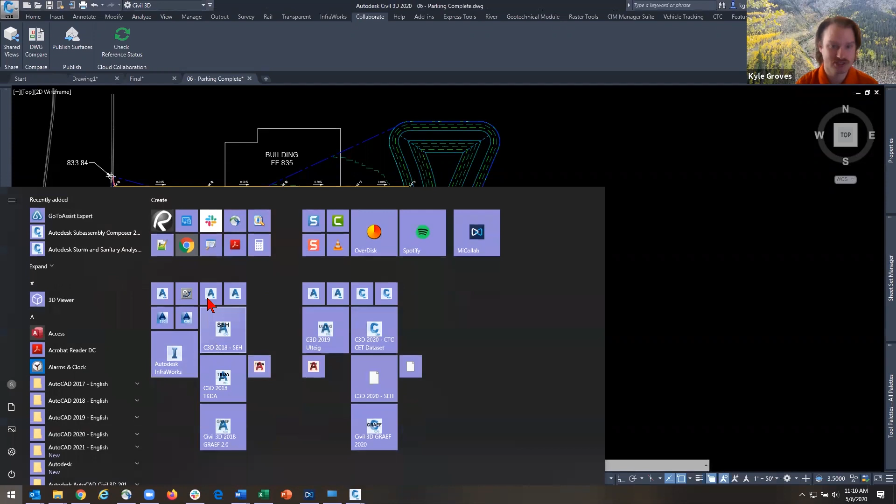Kyle Groves, hey, me again. Yeah, so new versions that will do 2D flow analysis like HEC-RAS? No, I never used HEC-RAS when I was in industry. I did use some HEC-HMS, which is similar to other programs like HydroCAD, as well as Civil 3D's Storm and Sanitary Analysis. Storm and Sanitary is a robust modeling, a robust H&H modeler, but as far as communicating back and forth between Civil 3D and HEC-RAS, you'd be looking at downloading the free Autodesk-published River and Flood module.

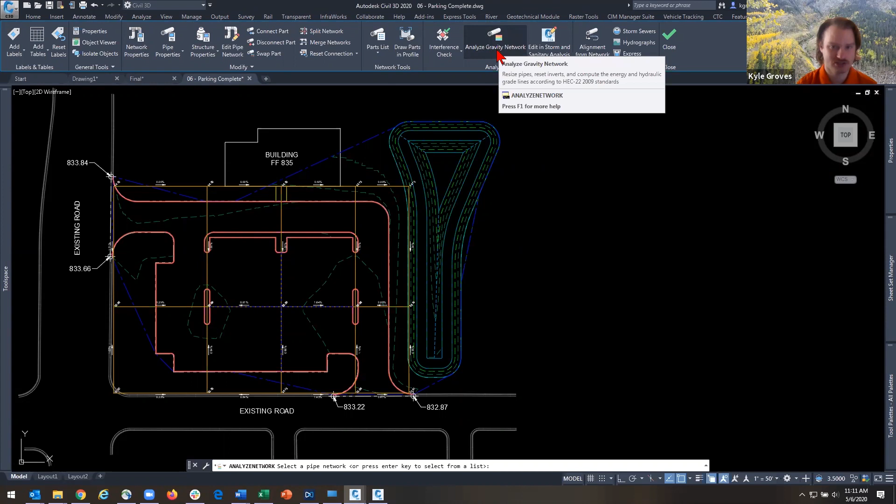It helps you create your sections and get that information ready to be consumed by HEC-RAS. There's also the pipe network module—let me get into my contextual ribbon—there's the Analyze Gravity Network inside Civil 3D. They brought that functionality in 2018, and it's been getting steadily better through the versions. I haven't tried it in 2021 yet, but in 2020 it's pretty all right. It goes through and runs a rational analysis on your pipes, helps you do some resizing of both your pipes and your structures, and you can get some info in there. I don't have a pipe network up right now, otherwise I could go through that.

Does that answer your question, anonymous attendee? Mr. Attendee, yep. Well, while we wait for that one...

And this may be for you too again, Kyle: is there a benefit of using pressure networks over pipe networks for water lines?

I have not grown to like the pressure network tool set. It's gotten a little bit of attention over the last version or two, but we actually do have, somewhere in the ATG archives, a pair of webinars on how you can use the Gravity Pipe Networks toolset to do a pretty decent workflow of designing and modeling your water main systems.

A lot of feature lines, a little bit of light duty pipe network part builder editing for your catalog, just kind of rename some stuff, throw in some new blocks. I don't like the pressure network toolset very much. Let some other folks weigh in on that on the panel.

It looks pretty in 2D in plan view, so you can actually see the valves and the T's. But once you look at profile view of the pressure networks, it looks a little bit ugly. I guess the only benefit that I see, pressure versus gravity, is putting in those vertical bends is a little bit easier. Other than that, most people haven't found the need or the desire to move from using their old workflow of gravity networks into the pressure.

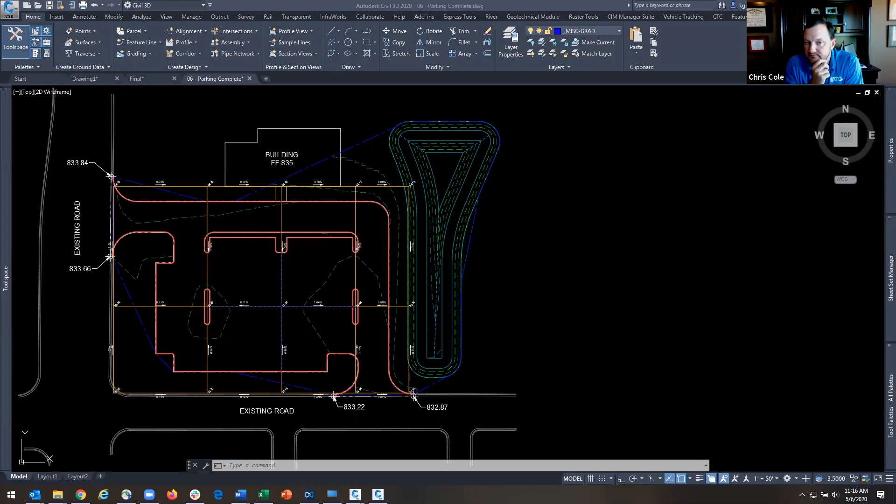And then it's just a matter of simply linking your XREFs and stuff to that file as you build it up. So Alexandra said they don't use Civil 3D. I guess they're using a pure AutoCAD software. Yeah, well, MicroStation and AutoCAD, two different mules. Civil 3D is based for this kind of work, this infrastructure work, and it's your best bet for your money if you're going to be doing a lot of infrastructure and roadways.

Hey Frank, the biggest thing that I read on that is when we change layer properties in this file, they're looking at changing one line or one layer from red to blue, and it affects all 100 sheets. Whereas right now it's using layer states.

So, right, I mean, you could definitely run a Lisp routine on there that could automatically change that information. But yeah, the template starts you there, but having to change properties in the layers is a little odd there. You might, like I said, need a batch routine or a custom Lisp. Okay, anybody else?

Okay, well Patrick, I think this one's probably more geared to you. The second question was, is there a way to generate coordinates of an object based off of roadway stationing? For example, if we have 50 objects, we'd like to be able to quickly get each of their stations and offsets from the center line.

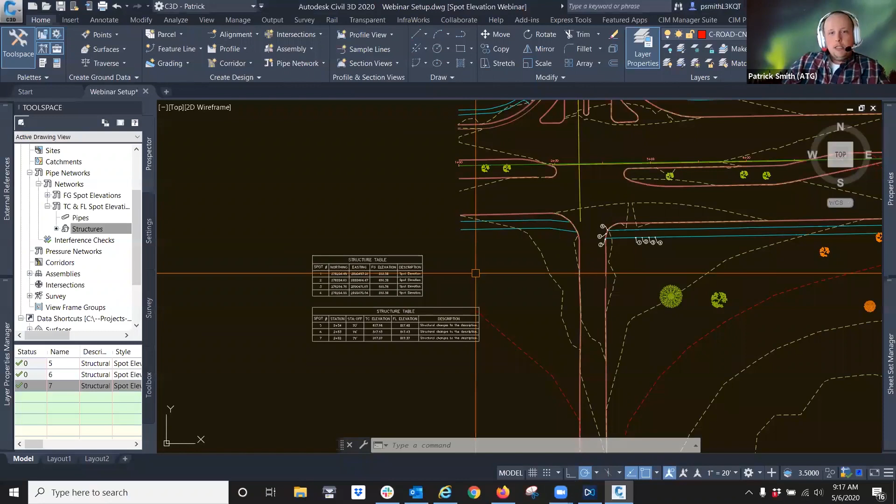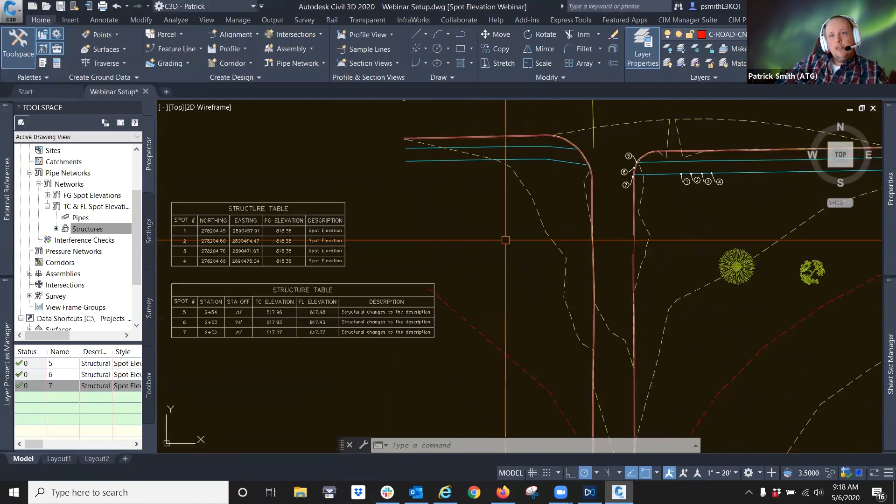Well, there's a method of using structures in order to get either northing, easting, or station offsets from center lines, or any alignment. You can get TCFLs, top of curb, flow lines, and I have a webinar coming up on how to set up all this information, because the setup does take a little bit, but once you get it set up, it's

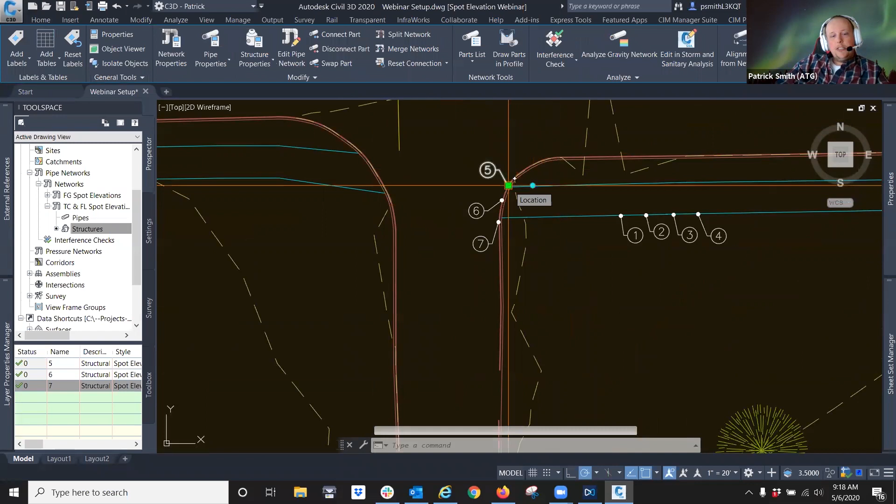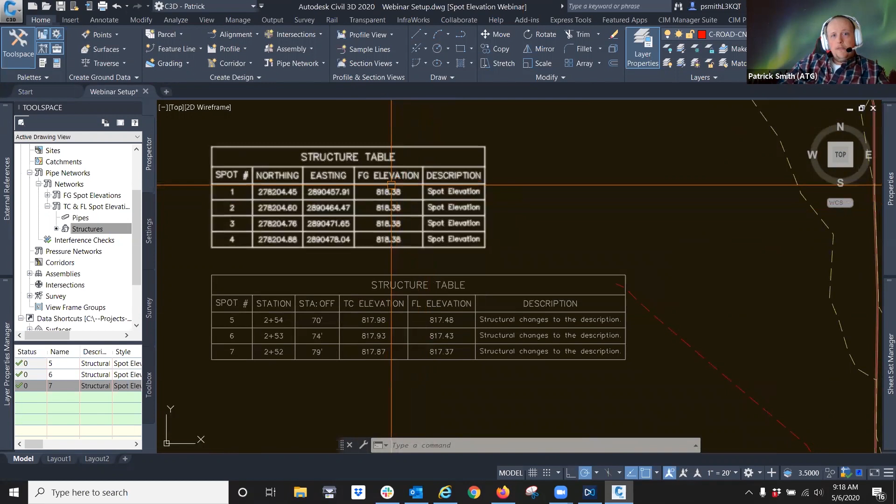pretty seamless. And just by putting down any of these structures here, it updates into a table, giving you your station offsets from that center line, or you can also have northing, eastings, however you want to show it on your table. Elevation points of wherever you put your structures. So it all updates in that table wherever you put your structures.

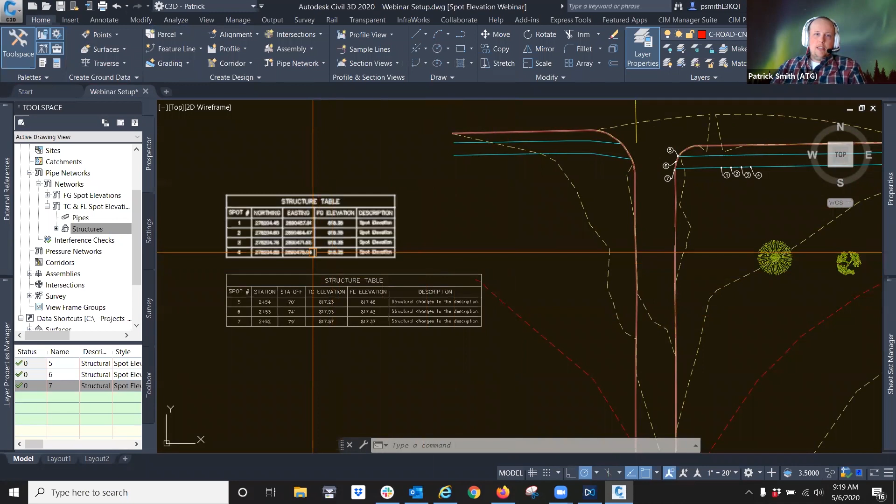Patrick, can you talk a little bit more about why pipe network structures do a good job at this as opposed to COGO points? Well, COGO points, I don't believe would give you a station offset from a center line. They can give you northing, eastings. Also, putting it into a table, I think, frees up a lot of room in your drawing instead of having labels with massive amounts of information, whether it be descriptions, northing, easting, then your point number, and then you might want elevations on top of it.

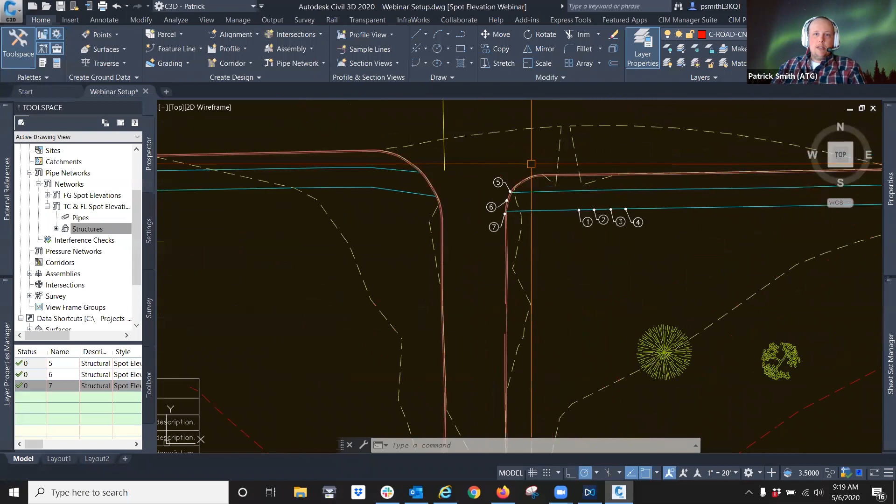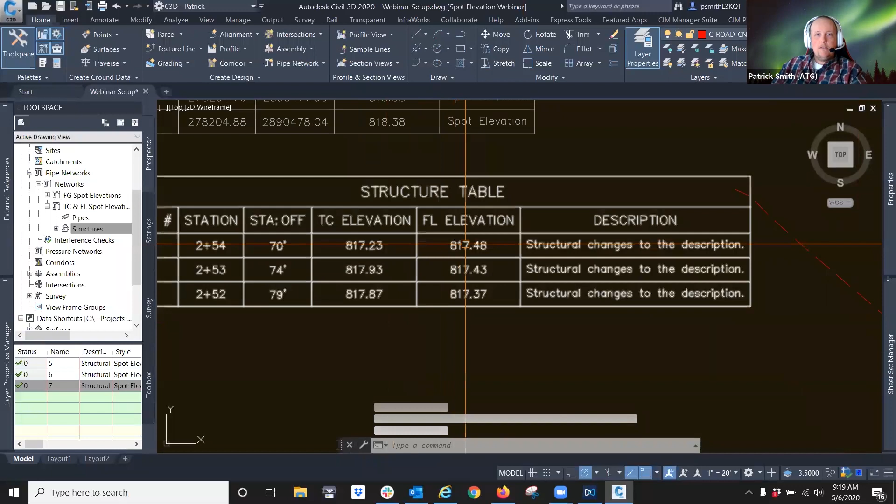I mean, having it in a single number here and then referencing that to a table, that's a benefit to using this. One thing that COGO points wouldn't be able to do is this section right here is giving you two separate numbers off of one point. This is just an example of a top of curb and flow line. A top of curb is going to be 0.5 or 6 inches higher than the other one.

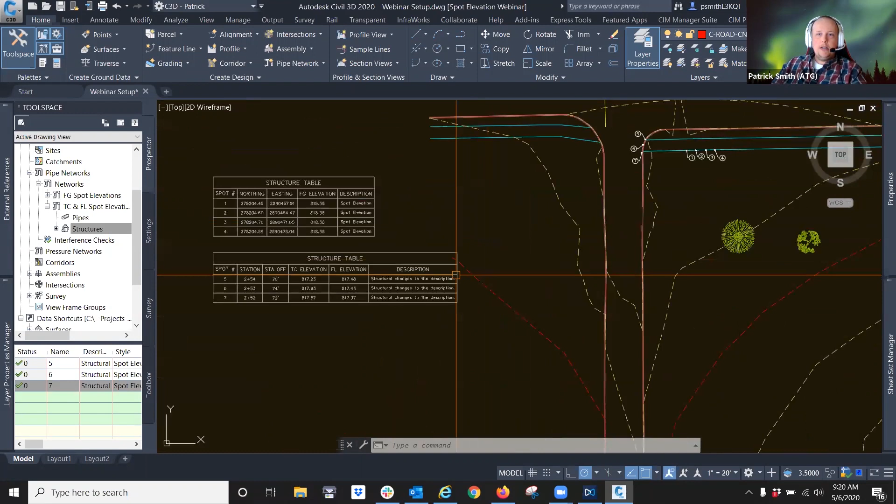I just put down one single point and it will give you that 0.5 increase or decrease, however you have it set up. And I don't believe COGO points will do that for you. Yeah, I also don't think, even though you can set them up with a station offset originally, you can table that info, because it's not tracking it dynamically. Yeah, and then if you were to add in, if I can do this here real quick.

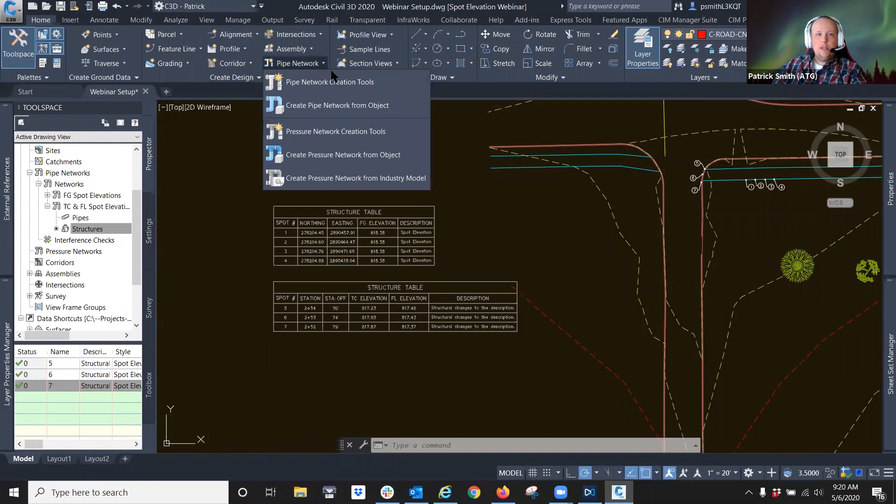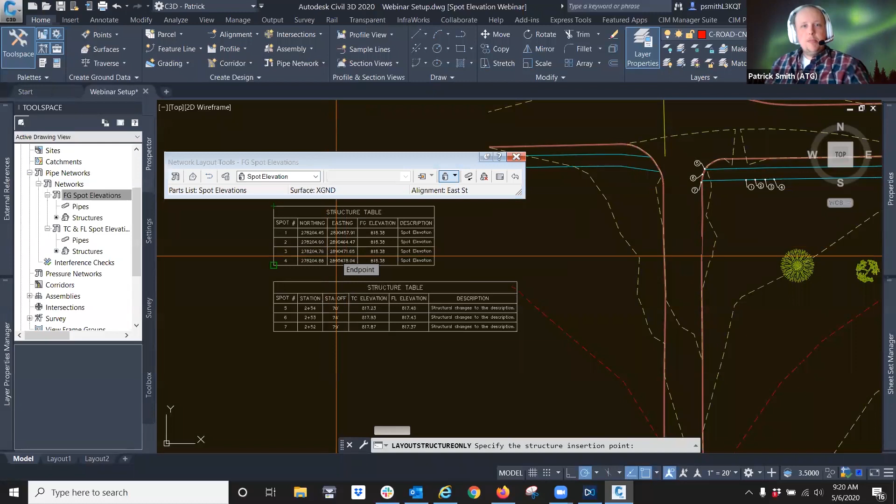I was going to say, this is a great workflow, great workaround that Patrick has found. So if you guys can attend this webinar, this would be well worth it. When is that coming up, Patrick? Sometime this month, I believe. I don't have a set date on it yet, I don't think. But I'm pretty much set up and ready to go whenever it needs to happen.

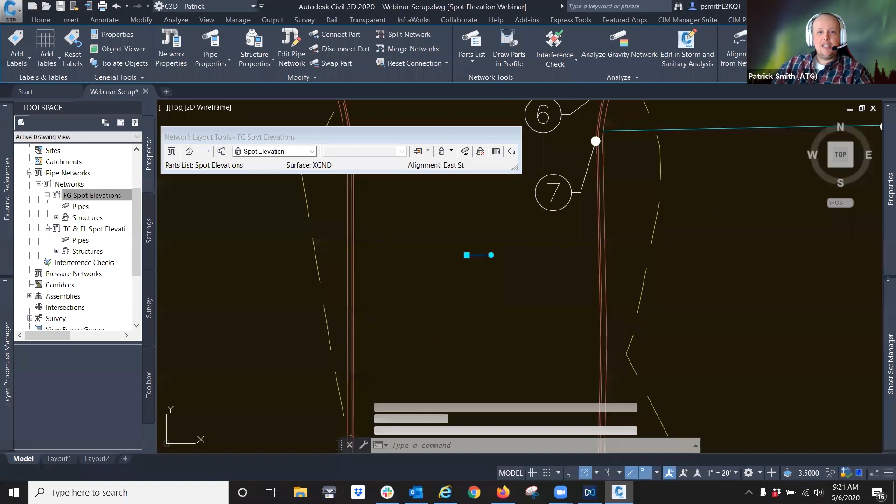One thing that I do have issues with is sometimes when you throw down a structure, my cursor kind of goes away like that right there. Just kind of disappears. I just click off the screen. I think it's not just for this workflow. For me anyways, it seems to be with any pipe network. It's a Civil 3D issue, I think. But don't freak out if your cursor goes away either. But yeah, that's pretty much it.

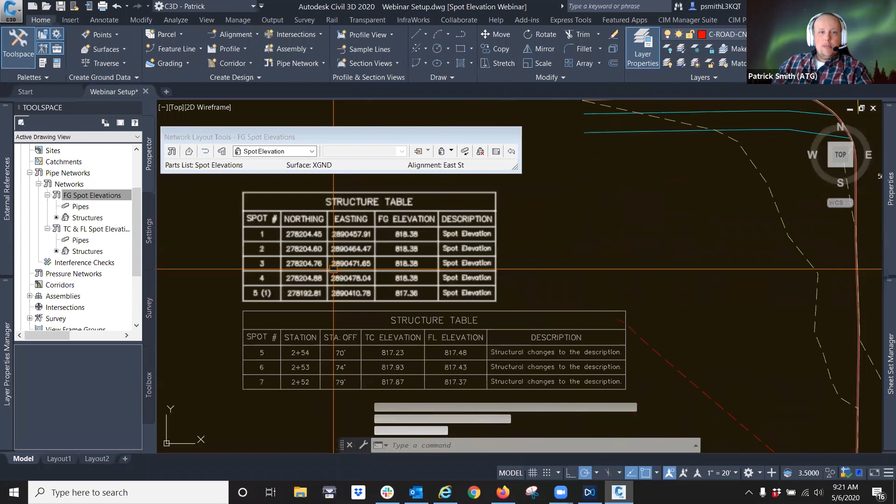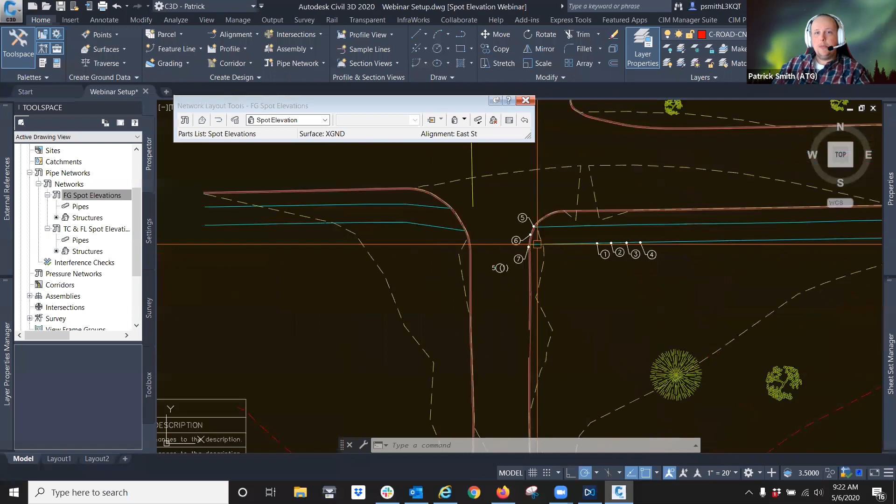I mean, throw down a structure at any given location that you want to find an elevation or station offset for. So these station offsets are coming off of this alignment right here. I also have another one set up over here. But yeah, once it's set up, it's pretty seamless. It's the setting up that takes a little bit, but once you get it saved into your template, it's easy going from there.

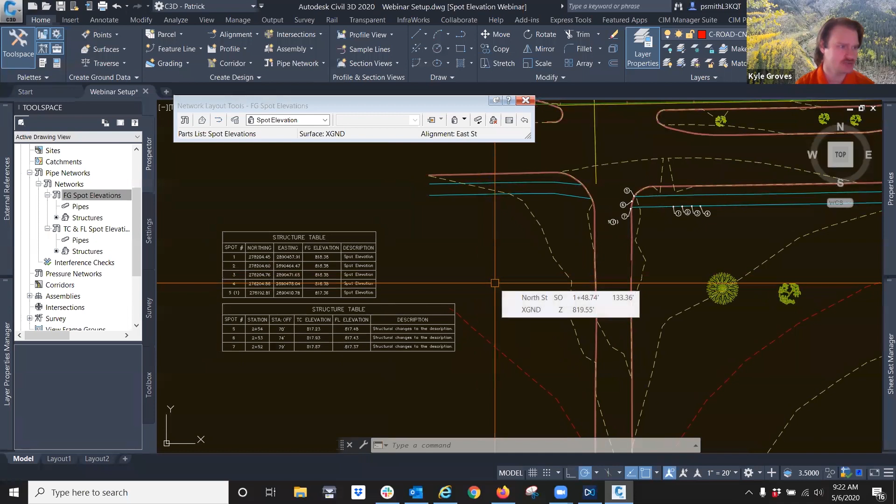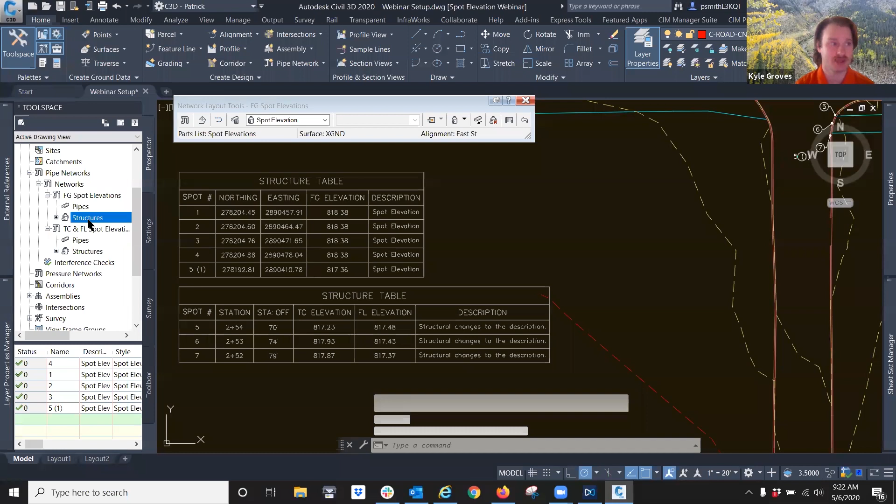If you're creating 100 sheets on a roadway project, you're probably doing plan and profile, and you're probably doing cross sections. Civil 3D has a couple of different tools that makes getting those sheets themselves put together a lot more efficient than manually pasting around a whole bunch of plan view and profile view scaled up blocks that say, give me a viewport over here. That's really going to cut down on the amount of time in your model to put that together.

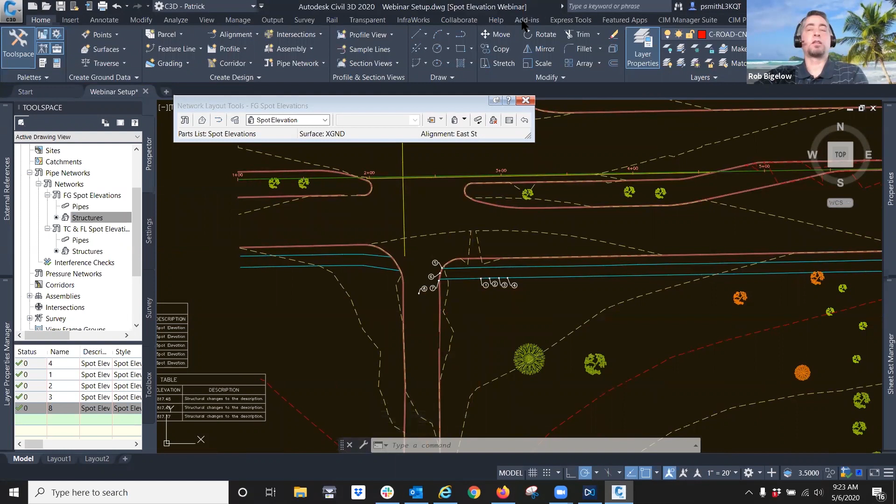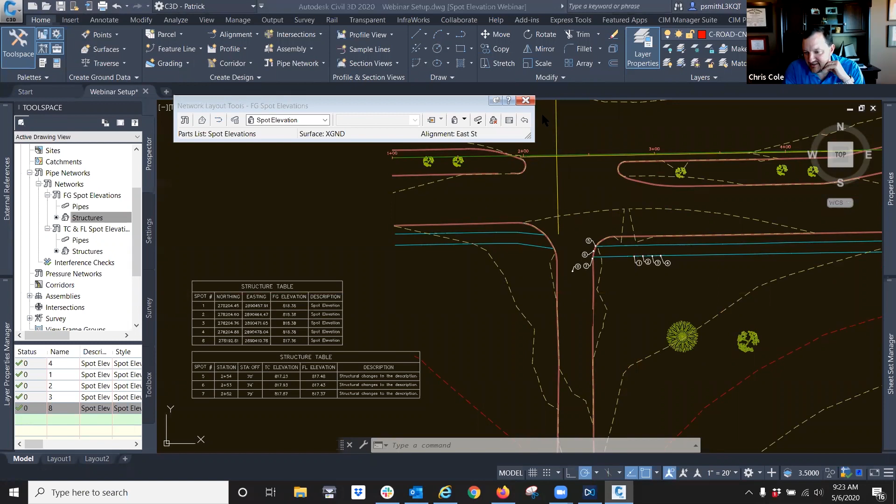Awesome. So I'm going to push this question over to Chris and Jason, and I want to see what their perspectives are on this. Somebody asked thoughts on Dynamo. Are you guys using any Dynamo at Hilgard right now? This is Chris. No, I have not tested it yet to see how we would benefit from it. Okay, interesting. So for the panelists on the screen, I know Patrick on the Revit side is pretty engaged with Dynamo on that side. Anybody on this side using anything Dynamo for the civil side of the fence? Nothing? Not yet.

And then another one said, if I have a pond volume that I need to achieve and I know the bottom and top elevations of the pond, what's the best way to size the pond for the desired volume? If you can circle back to me, Chris, I might be able to have some live workflow to walk through for that. Cool. So Kyle, just ping me when you got something put together for that, and we can bring that up. And then Alexandria said, good to know. We are landscape architects, so we only do plan, but we should consider Civil 3D.

So while we're at a little bit of a lull here, I'll throw this question out for all you guys. If there was one Civil 3D function that you could get Autodesk to add in that's not in there right now, what would it be? I'll start off with that one. I would like to see pads being more dynamic. So if you got your corridor going through, have it automatically assign pad elevations. I had a situation at one job where we used Action Recorder to help produce that, but I wish it would be more dynamic.

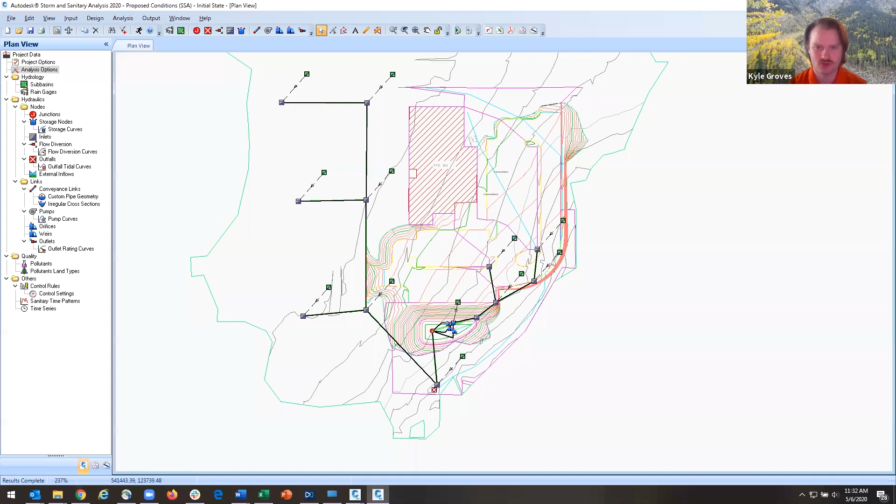But anyway, one of the things in Civil 3D and in stormwater design that we're constantly worried about is how big our detention basins are. And I'll bring us back into Storm and Sanitary Analysis to look at all of this. Now, before I answer the direct question, how can we make sure that we're using contours and elevation, area and elevation, to do all that determination, I do want to point out that Civil 3D does have an ability to create an export of the information for your contours and their area inside Civil 3D.

So if I'm looking at my Analyze tab, under Design, I can run this Stage Storage command, which is going to allow me to define a detention basin either from polylines that I've already extracted or from all of the currently displayed contours on a surface.

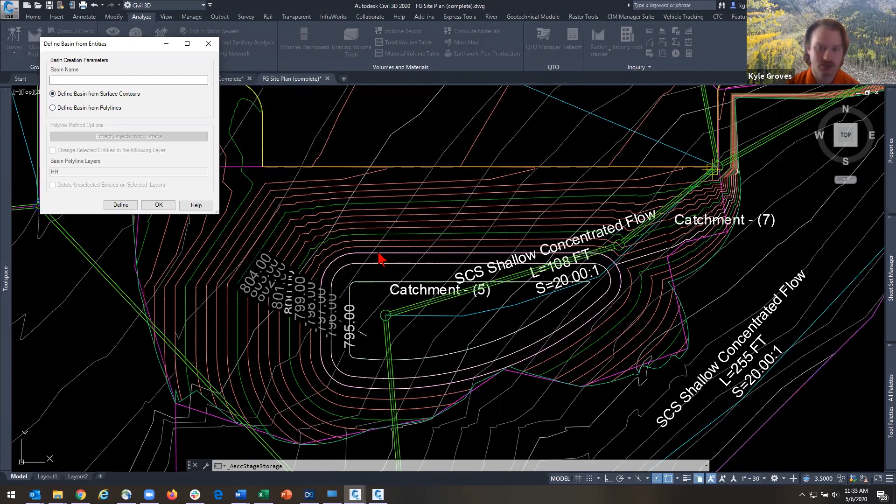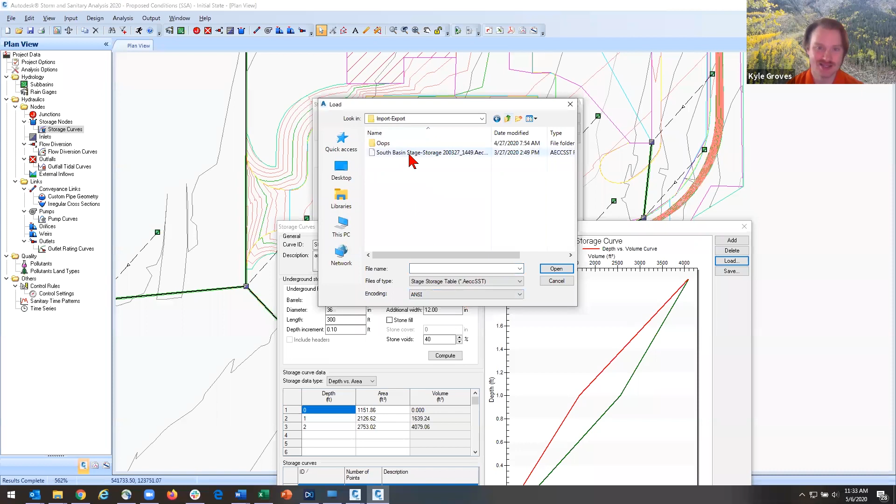When I do that, it's going to generate a somewhat silly file extension name, but I can take that file extension and I can go into Storm and Sanitary Analysis. I can have a storage node. I can load a particular stage storage curve, and that's going to be, again, kind of an AECCSST file. That's going to take my contours from Civil 3D and automatically load that to me in SSA.

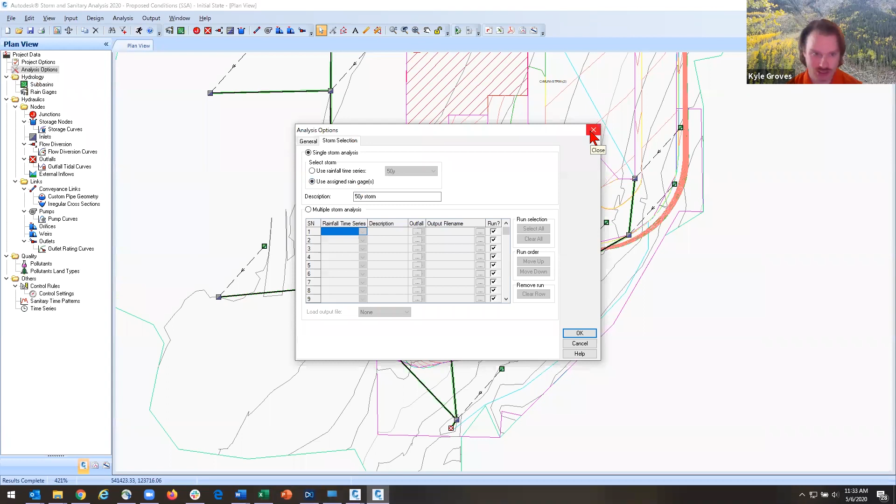Now, my data set isn't perfectly set up for exactly how to answer this question, but I can at least walk through the theory. When you run your existing conditions, it'll produce a hydrograph for all of that, and then you can also run that same thing for your proposed conditions. So once you have all of your solution files saved and ready to load, you can go into the time series plot portion of Storm and Sanitary Analysis, and you can actually load up those individual solution files.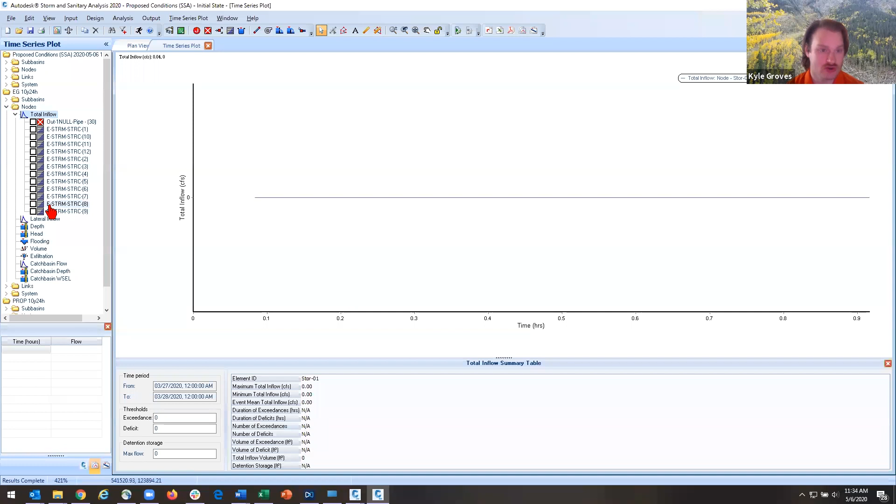So I will open up my existing 10-year storm. I will open up my proposed 10-year storm. And now what I'm going to do is compare my nodes. So basically it's that same outfall node. Your water's leaving the same spot in both conditions. It's just a question of whether or not it's been detained. So that's my existing hydrograph, somewhere near 2.6.

And then my proposed hydrograph is, again, I said this is not going to look quite right because my proposed is actually less than my existing in this particular instance. But now that I have these two graphs stacked on top of each other, I can look at my maximum inflow going through both of these. So 2.7, 1.7, I can see there's about a difference of 1.0 CFS.

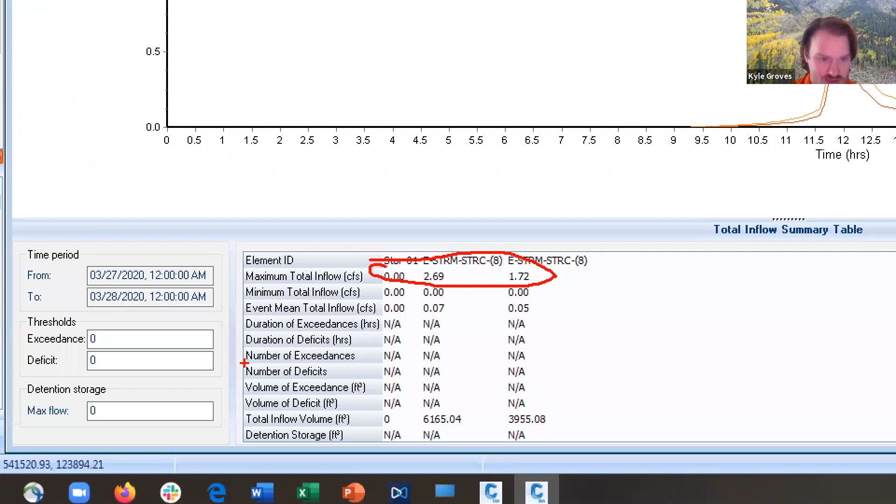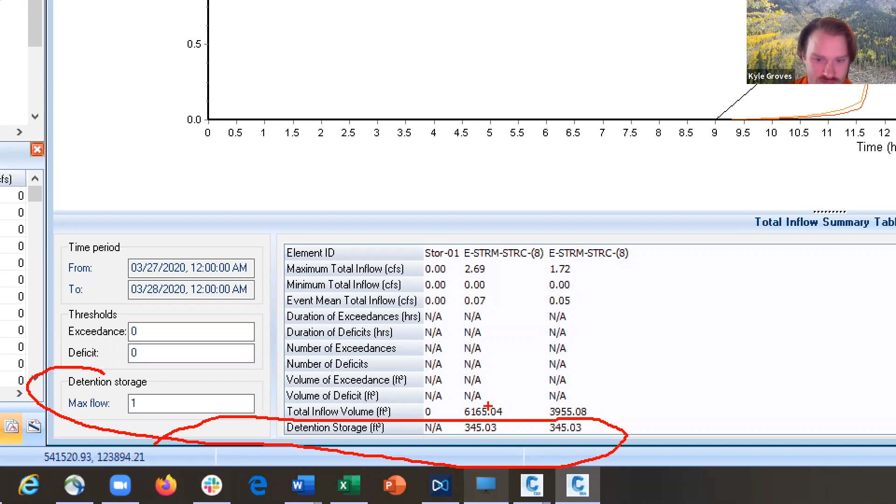So SSA will actually help you calculate what storage volume is required for your basin based off of that maximum flow. So when I type in 1 for my 1 cubic foot per second, it's going to come through. We just saw some stuff play down there in the bottom. And now my detention storage for these nodes has been calculated at about 350 cubic feet. So depending on what that is for your project, and again, this is a little backwards, but it's basically just doing all that calculus for you.

Giving you your detention storage volume, you would still be on the hook for going back into Civil 3D and making enough contours, making them the correct area to achieve that volume. But SSA is going to help you get closer to understanding where you need to be for all of this.

Awesome. Thank you, Kyle.

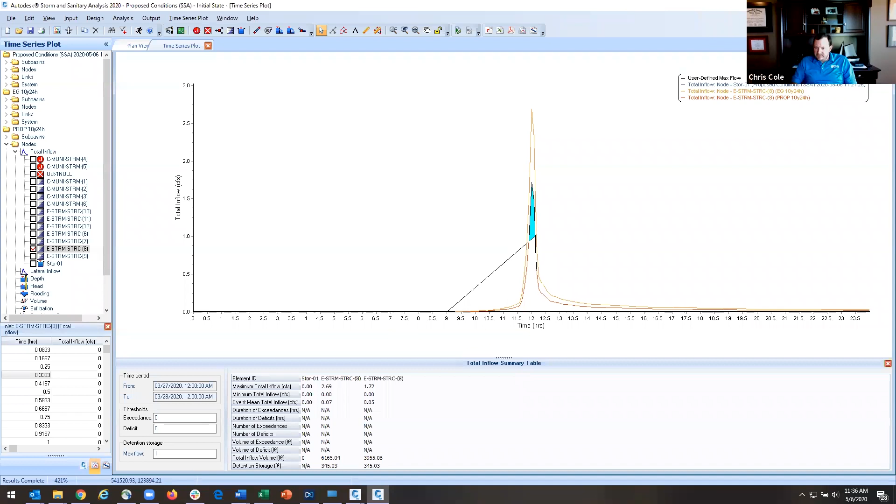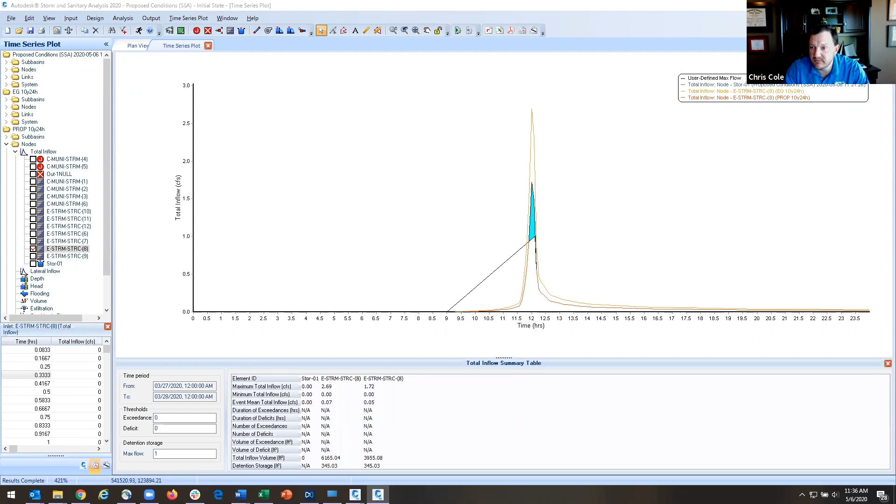So while we're waiting for some more questions to come in, another thing I hear a lot on our side is data shortcuts. What are the benefits of using data shortcuts in the civil world? Data shortcuts are just like an X reference that keeps the guts back in the source drawing, but brings its appearance into the destination drawing. What this allows you to do is keep your file size under that 10 meg limit that we like to say, one drawing, one purpose, where I can start a topo drawing and it'll be 2.5 megs.

But then when I go into my alignment and profile drawing, I X reference in all the line work from the topo drawing, but I'll data shortcut the surface into the alignment and profile drawing, build my alignment and profile, and my drawing will actually be about 2.5 megs. Same file size, twice the amount of data. And using the data shortcut through the entire process of a civil project, you're going to keep your file size typically the same all the way through.

The other good thing about a data shortcut is that when I build my corridor, I can data reference the EG surface and then use that as a target for daylighting my corridor. I have that ability to use it as targeting further down the road. While I can target some things in an X reference, like survey figure lines, it's not recommended that you target a surface in an X reference.

So Scott, how hard is that to learn? If I'm not using data shortcuts today, what's the learning curve on that? 15 minutes. Pretty short. Okay, cool. Yep. Awesome. Pretty simple to learn.

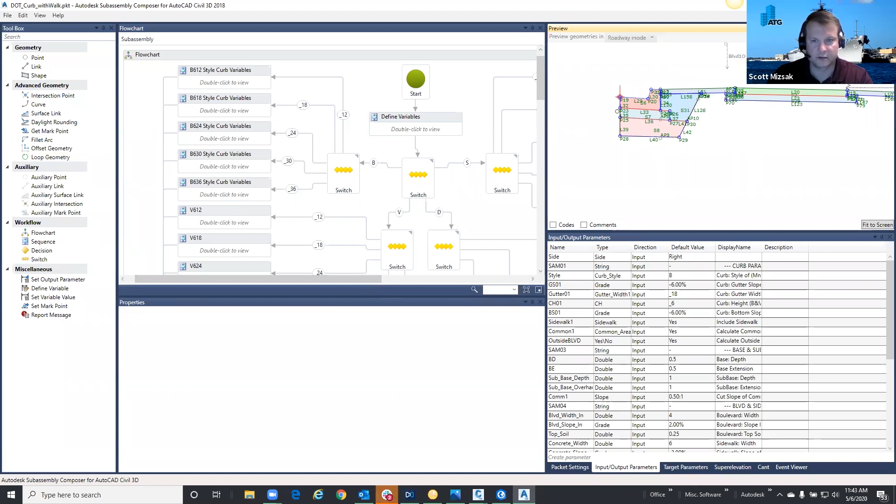So the question is, you want to add point, link, and shape codes to objects inside Subassembly Composer. So what I have here is my curb with sidewalk subassembly, and I want to add some point codes, link codes to L29, P19, and P20.

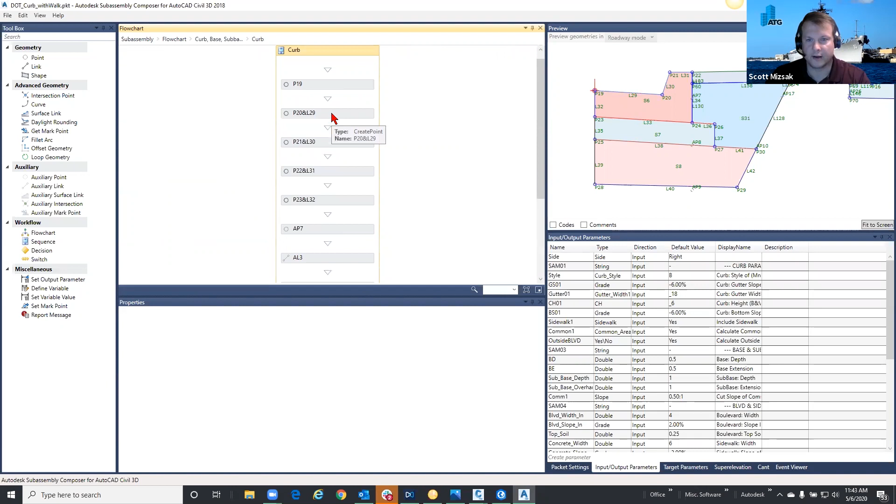First thing I always do to make things easy is I will click on my line, and then it will show what sequence it's in. So I'll just go into there, go into my curb, and I will see L29 right there. And this one is actually hard-coded, P20, flow line gutter. If I turn on my codes, right in there, you'll see flow line gutter there.

So I will put in quote marks flowline_gutter because that is the Civil 3D out of the box point code for that. So now if I have a code set, everything will match. If I use out of the box subassemblies, it will match. For my line, I have curb and top right in here.

Also hard coded in, but I do have the ability in my input output parameters to come in, and I probably picked a bad one on here. Point, link, and shape codes. I have the ability to set my link code for the inside vertical on there. And that is my base inside vertical L35, set to none. And if I come in and make that Scott, it now changes to Scott.

And if I come back to my flow chart and look for L35, it's going to be in that same spot, but just now in the base and L35. And because it's an input parameter, it doesn't get quote marks around it. Quote marks is for hard coding. Base inside will match my input code of base inside. And I can do that for point codes, link codes, or shape codes.

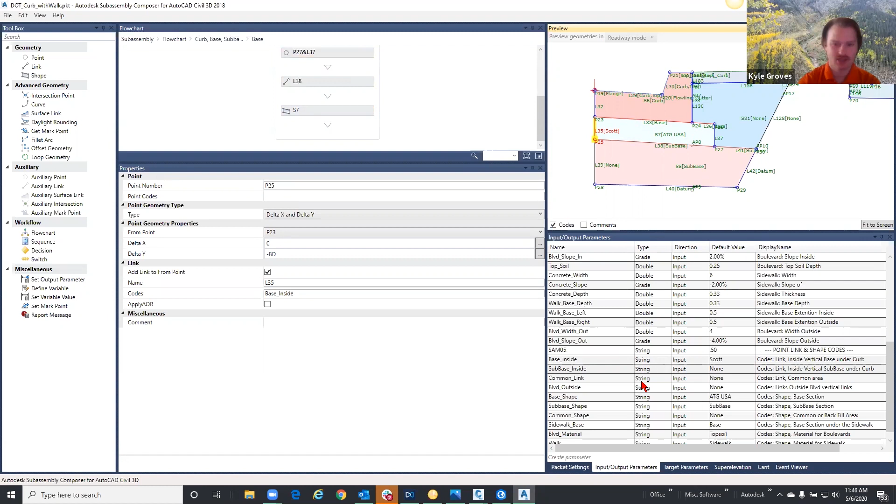Scott, do I want to add like 500 parameters in one go? Oh, always. Just for the fact that there is no rearranging out of the box, which is one thing I would love Autodesk to do, is give me the ability to drag and drop. So what I typically will do is I will create about 30, 40 parameters at once, well, maybe 20. And then I just come through, and as I build, I will add.

Now, if I need to move, say, my common shape input parameter above my base inside, I do have the ability to take my PKT file, rename it to a zip file, extract my zip file, go into the XML, and do some cut paste on there to rearrange it, but it is a pain in the butt. I found it's easier just to come in, click on one and say create new parameter, and then manually recreate, and then come in and delete the one that I wanted to move.

But it does take a little bit of thinking ahead of time to say, hey, how do I want to put this? How do I want any input parameters? How do I want my users to see it? And that's what I've done on here, is I've created a dummy input code that actually says curb parameters, all caps, and then I put all my curb stuff in there. Then I have one for base and sub-base parameters. So in Civil 3D, you will actually see this broken down into kind of subheadings.

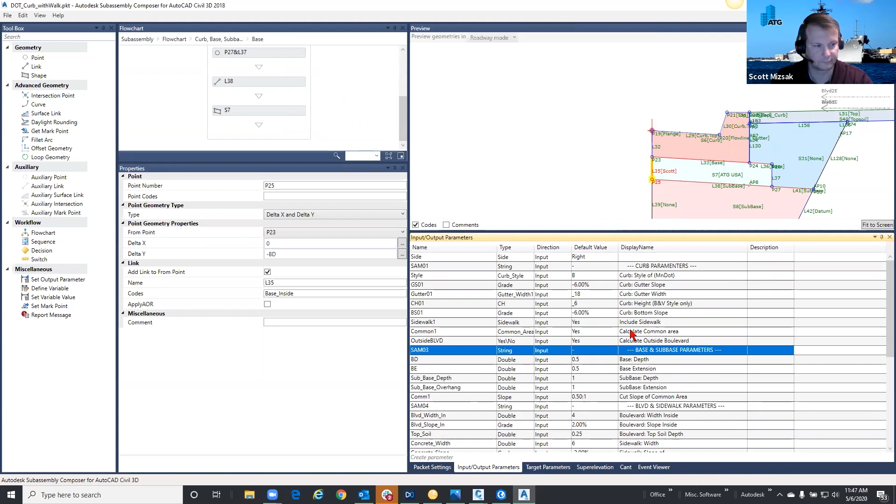Yep. Awesome. We got several questions come in, so we'll try to keep answers pretty short and sweet here because we're running close on time.

Okay. Brian has asked, he's heard there's some issues with SSM with BIM 360. Any truth to that? Anybody know? I can not agree or disagree. I have not dealt with the sheet set manager in BIM 360 yet. Okay. Any feedback? Kyle? Anybody else? Have not had that experience. Can neither confirm nor deny.

Okay. The best place to be. Kyle Groves: So in Civil 3D, what is the difference between using grading or surfaces? And is there a benefit of using one versus the other?

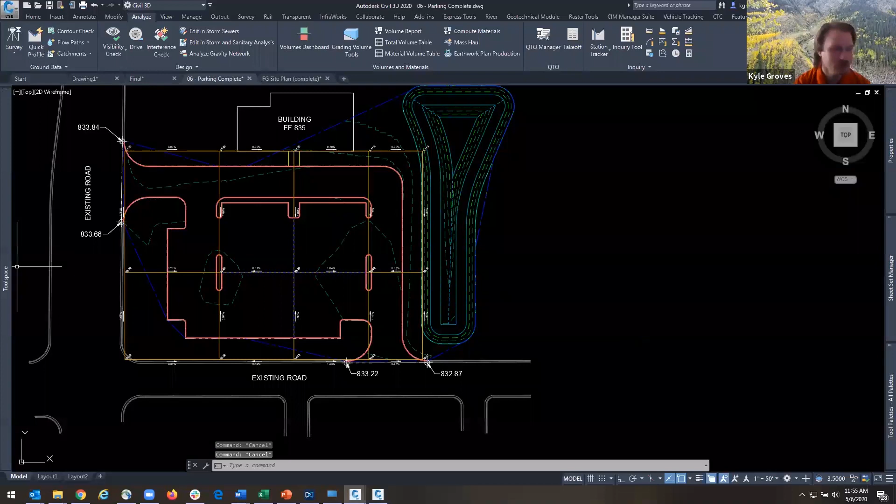Actually, I have some comments on that one. Let me share my screen here. For anyone here on this webinar format, it's going to be kind of hard to get a raise of hands, but just pat yourself on the back if you are familiar with a setting in your Civil 3D sites called the feature line style hierarchy.

So what this does is it's one of the very few settings that live in the prospector tab as opposed to the settings tab. But if you go into a site and into the properties of the feature lines, you'll see this dialog that has, at the options tab, your feature line crossings split point resolution. When you have multiple feature lines that live in the same site, and a site is basically just a bin that we use to keep everything together, anything inside of a site, as soon as it crosses, has to share the same elevation. If you want different elevations, they have to be in different sites.

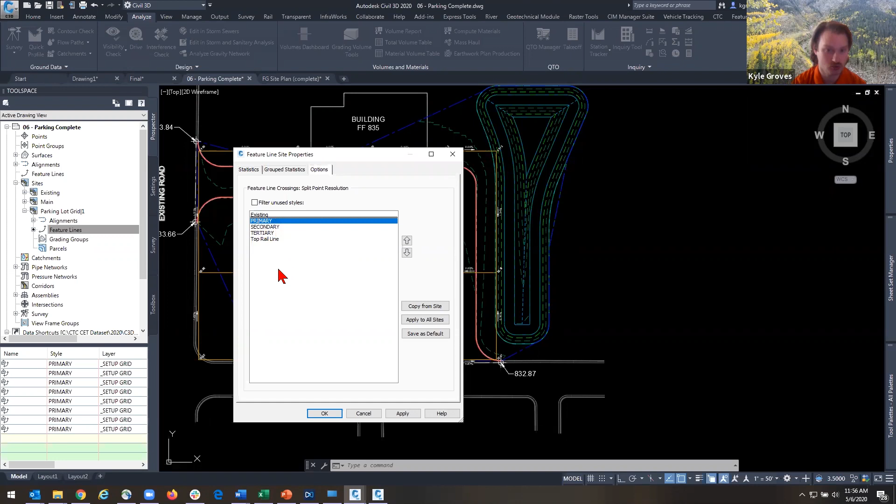But what this setting does is it says, when I have two feature lines that cross, do I want to be deliberate about which one of those elevations controls? So basically you can say my curb line is more important than my landscaping, or whatever it is, you throw it up or down in priority. You can come through here just like most of those other interfaces in Civil 3D and rearrange these. But what this means is you get to prioritize your design information.

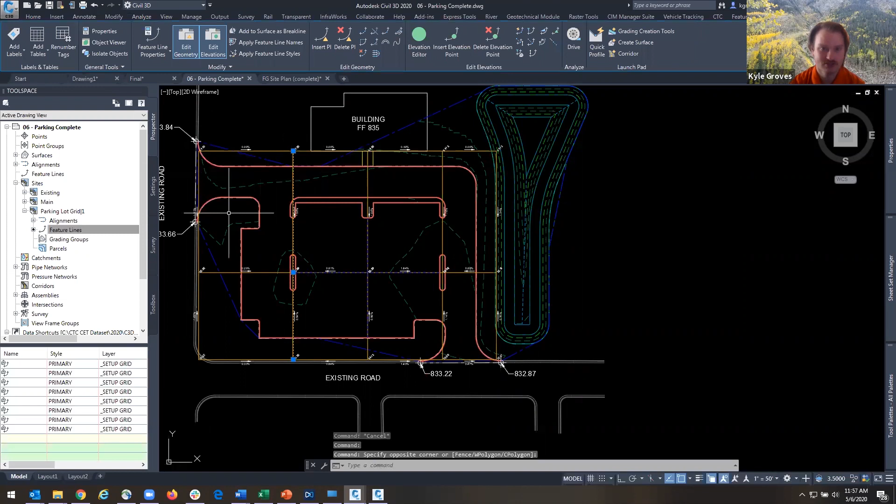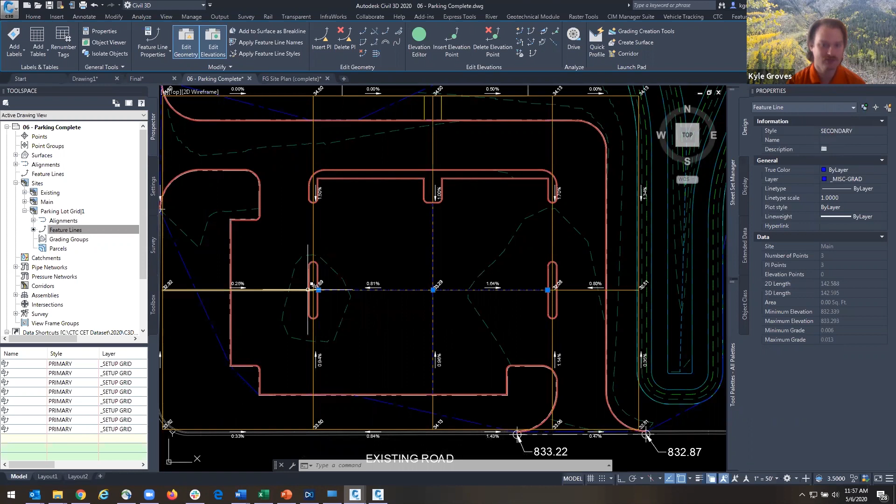So in this file, I am using multiple surfaces, which is kind of outside of your question, Nick, but I have a couple of different things set up where I'm using a feature line, with my properties palette open here, of the primary style to go through and do all of my major design information. But then in other areas, I have a feature line with the secondary style assigned to it so that when it follows or intersects or crosses over any other feature line information, it's just going to automatically read that data.

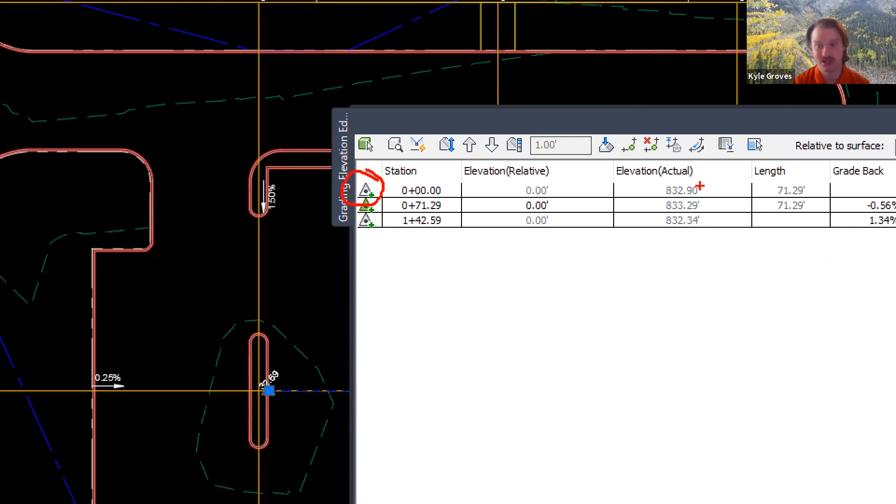So when I have this secondary feature line selected and I go into my elevation editor, I'll actually see that most of my points are gray instead of being green with their resolution status. And that means I can't modify that elevation because it's being controlled somewhere else. This secondary feature line is being controlled by the primary feature line right underneath it.

So for your case, Nick, I would say that whatever one of those 2 points you want to hold that elevation, you would set it to a feature line style that is high or at the top of that hierarchy. And then those other 2 feature lines can be at a lower hierarchy. And then when you come in and just drop your vertices on top of each other, they'll all take that same elevation from the highest priority feature line.

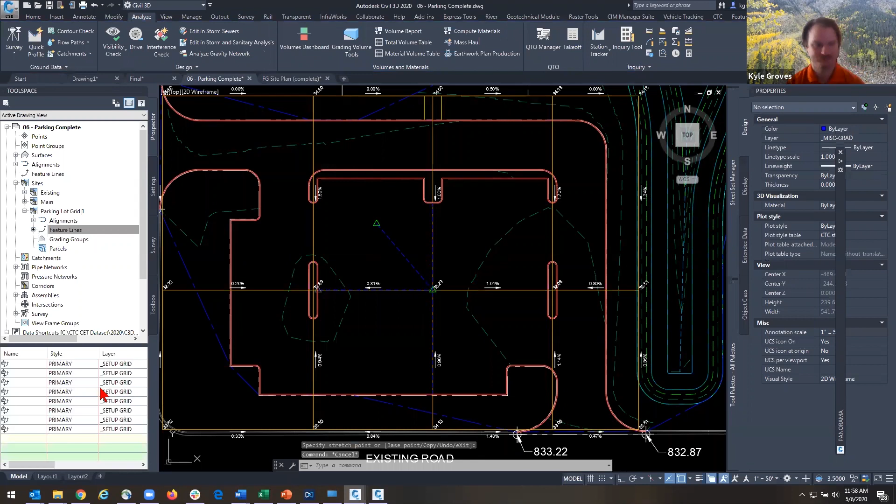Awesome. Well, guys, it is 11:58. We have gotten through all the questions, I believe. Any parting thoughts of wisdom from you Civil 3D gurus?